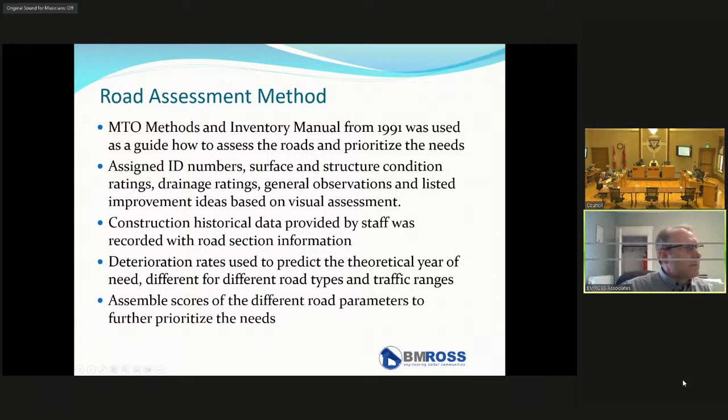We assembled the scores of the different road parameters to further prioritize the needs. This is an example of the appraisal sheets that our technicians use in the field. On the left-hand side, they're entering all the parameters to help define the roads, including condition ratings at the bottom. On the right-hand side, they provide spot.

Road improvements would be localized things in one location. Specific maintenance would be the type of maintenance that might go for the whole length of a road. And other construction work could be storm drainage improvements or other work needed along that section of road. So we can identify that we're in the field, and it helps to provide cost projections that we can use in the reports.

At the bottom is where we would put the information pertaining to the history of road repair work that's taken place in the past. That might help a little better. Down here is where the history information is kept.

Okay, jump ahead. This priority scoring figure just helps to illustrate the relationships between the information we gather in the field and how we work towards the priority scoring.

On the left-hand side, there are three key parameters that we look at. There's the performance grades, which is a score to say whether this road is built up to the type of standard and the way it should be built, or if it has a lot of high maintenance needs. We would have a score for that.

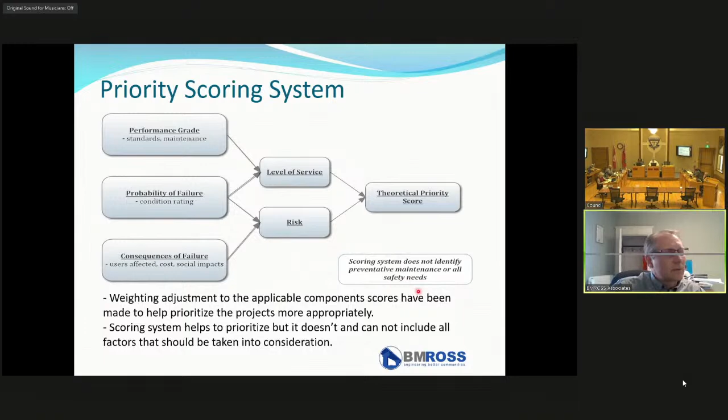The scoring system helps to create risk scores and level of service scores that can be used with your asset management. Performance grades allow the ability to identify other deficiencies with your road systems and put some emphasis on addressing safety concerns or substandard assets.

It provides a theoretical priority score for the improvements, and it's considered a simplified scoring method or concept that can be used with other types of assets as you're trying to prioritize your needs.

The scoring system is intended as a guide when creating a priority list, but there are other external factors that can have an influence on the priorities. For example, you may have water main needs, or some other bridge needs. So there are times when you'll want to adjust your priorities for road infrastructure improvements to correspond with that other work.

Just to summarize some of the issues with using the theoretical scoring system: it does not help identify preventative maintenance, so you have to take a look at those things afterwards or separately. There may be overwhelming safety needs that have to be addressed, some in the short term with maintenance repairs, and some more long term.

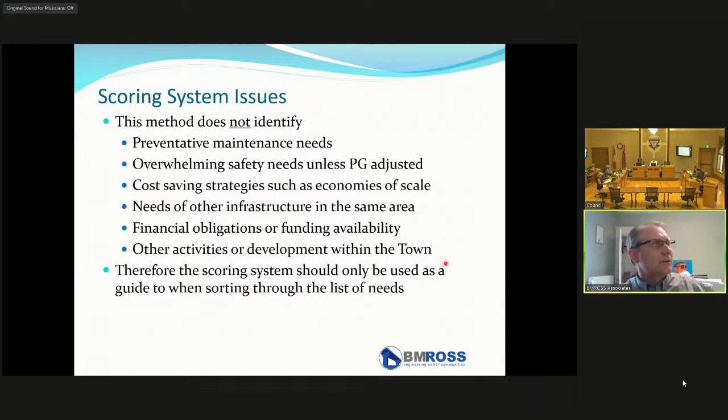And you can save money by pooling them together. There's needs for other infrastructure in the area - if you have water main needs or something, you may have to pull the road work ahead. There's also financial obligations, funding availability, and other development taking place within the town. So the scoring system should be used as a guide when sorting through your list of needs, and then you adjust your priorities after that.

So next I'm going to talk a little bit about some of the information we gathered, some statistical information about your road inventory.

In the top left, you'll see your road surface types. There are 4 road surface types within the municipality, a total of 354 kilometers, with 179 being gravel, 24 kilometers of LCB, 30 kilometers of HCB with only 1 lift of asphalt, and 120 kilometers of asphalt, high-class bituminous roads with 2 lifts of asphalt.

On the right side, this is the roadside environment. Again we have the same total, but this is grouping them based on whether it's an urban road in town with curb and gutter, or semi-urban, which typically has a shallow swale and might have sidewalks in town but no curb and gutter, often with a sub drain to help provide drainage. Then there's rural road sections, which have a full ditch down to the proper grade to allow drainage.

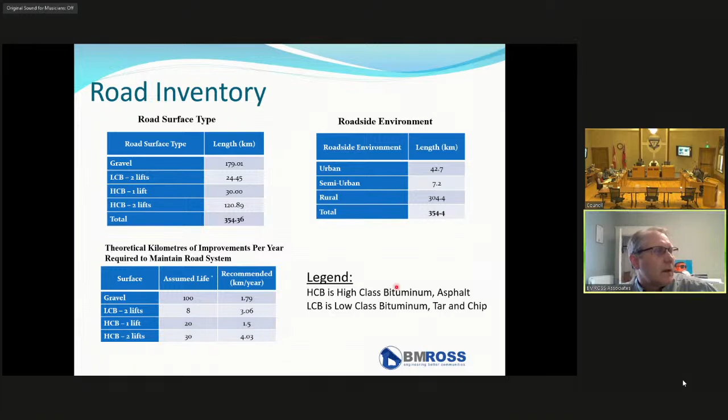Okay, I'll just jump over to the next slide. This next slide shows the condition ratings for the road sections.

This is showing the condition rating of the road surface. You can see here we've got some surface ratings, and the structural ratings are here - I'll discuss them in a minute. But the surface ratings are based on the condition of the surface of the road. For example, with the HCB, you're looking at how many cracks and some ride quality issues, but you're mostly looking at what you see from the top.

We find that the road surface condition rating is a good parameter to help prioritize, but we also want to take into consideration the structural rating when figuring out what method of repairs is appropriate, because a road could have a similar amount of cracks but be deteriorated for different reasons - it might be age, or it might be that the structural integrity isn't appropriate and you're getting wheel rutting. So that's why when we assess the roads, we assign two condition ratings: one for the road surface, another for the structural rating.

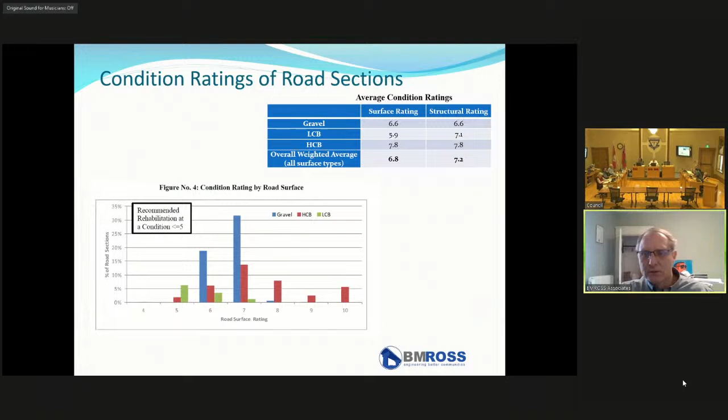I'm just curious about how the traffic counts are calculated and over what period of time were they calculated?

Ken: The traffic count data was supplied by the municipality. I may have to let the municipal staff clarify what year the data was from. Typically they don't analyze every single road, they'll analyze a representative sample and extrapolate that traffic data onto other segments. Don, are you available to comment on when the traffic data was collected? Or Shane? I can answer that. Through you, Mayor Finch, the traffic data was collected through the non-peak summer hours, pretty much when kids are out of school, because that's only about 2 months out of the year. Then they're up for 48 hours consecutive, and that's how we get the traffic data.

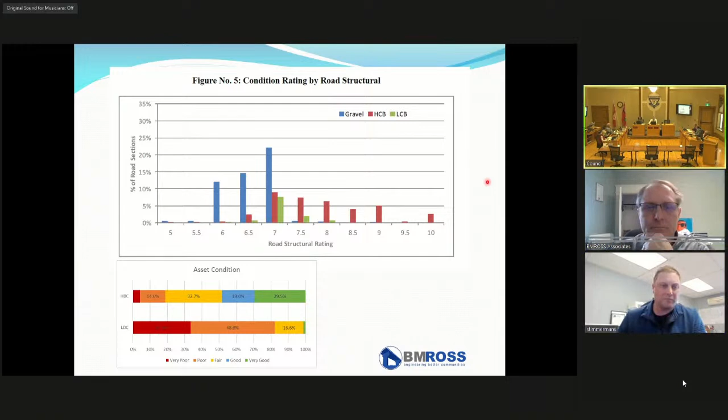Main Street is a little different — they stay up a little longer just because of the influx of up and down traffic. Thank you, Councillor Need. Thank you very much, Shane. Councillor Oak, go ahead please.

Thank you, Mayor. The 54 locations referred to in the report — is it possible to see those locations? The report says there are traffic counts at 54 locations throughout the municipality.

I'm wondering if something could be provided after that we could receive — I'm just curious which roads we're actually doing the traffic counts on, or traffic assessments on.

Yeah, we should be able to provide some of that information. I know we were given some of it — it may not be documented in there, because we were supplied the end assumptions for the different road categories. Your staff are familiar with where traffic typically turns and where the destinations are, so they can use that knowledge to more accurately predict where traffic goes within the municipality. But yes, we can look into that. Okay, thank you.

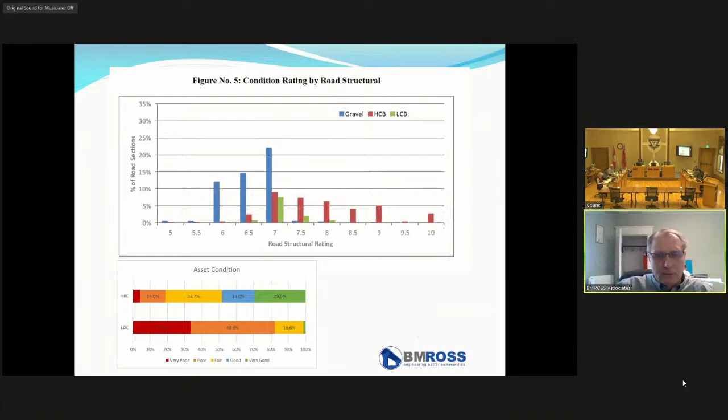Reviewing the information, our general comments identified in the body of the report were: condition rating suggests that many of the roads are due for reconstruction within the next few years. There are some areas where drainage improvements were recommended and ditch cleanout work.

The LCB roads appear to perform well for short terms, but these roads are not being surfaced quickly enough. With the limited number of LCB roads within the municipality, it may not be financially beneficial to continue with the LCB program. We noticed with some of the pricing you guys have paid in the past, that was a discussion that came up with staff, and we had to admit that yes, you are paying quite high prices, probably because of the small volume of roads you're doing.

On a relative basis, there are more road sections at Exeter, Centralia, and Crediton in need of work within the next 15 years than elsewhere within the municipality. There were some low traffic gravel roads with a poor base that are soft in the spring, but it's difficult to justify doing reconstruction for some of these, or for most of them.

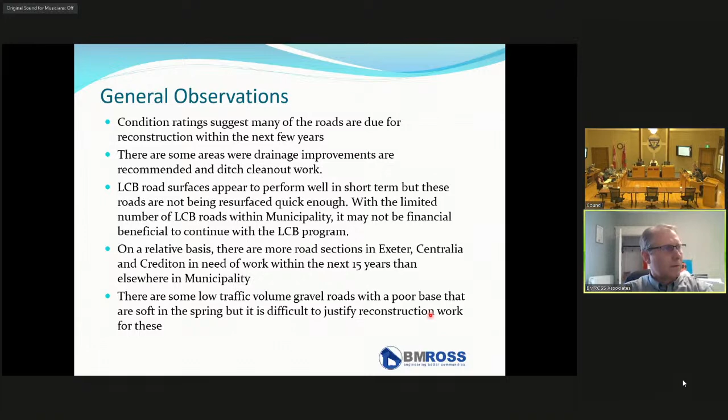Now we're going to talk a little bit about the minimum maintenance standards. The Ontario regulation 239/02 defines the minimum maintenance standards for highways, which includes some rules for sidewalks and for bike lane maintenance requirements.

The regulation sets out a system for different classifications of highways, and based on the speed and the average daily traffic count, the highway classification values are used to determine the minimum maintenance standards. These include things like patrol frequency, weather maintenance, snow and ice removal, road maintenance works such as fixing potholes, cracks, shoulder drop off, signs, and illumination inspections.

Once the municipality is aware of the maintenance issues, the regulation sets out how many days you have to complete the temporary or permanent repairs.

Down below, we provided a table which shows the distribution for the roads within your municipality. You've got so many class 3 roads, class 4 roads, class 5, and class 6. Class 1 would be your major arterial roads, which you don't have within your municipality. Class 6 are your back roads with very low traffic volume.

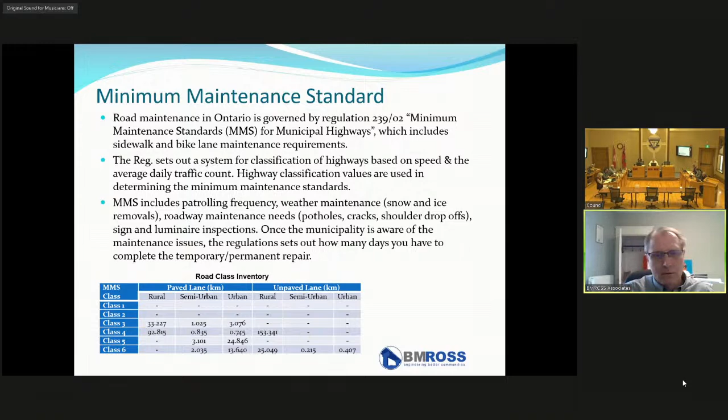The minimum maintenance standards also include some criteria for sidewalks, and sidewalk maintenance includes a requirement for annual inspections of the sidewalks within the municipality. Maintenance requirements cover things like discontinuity of height, say if there's a ledge that jumps up about 2 centimeters between the panels—these are to be identified and corrected.

There's encroachment like branches—say if you have branches hanging over the sidewalks, they'd be trimmed back. And winter maintenance for snow and ice removal and sidewalk patrols. Again, similar to before: once the issue is identified, the municipality is to work their way through and correct those things within a specific time period.

Now, there's also accessibility standards, the AODA standards. They're stricter than the minimum maintenance standards, but they only apply to how you construct brand new sidewalks, not how you have to maintain your existing sidewalks.

There are options for doing temporary sidewalk repairs, such as highlighting with paint. If there's an adjustment in height along the sidewalk, cold patching or grinding to remove those lifts. That kind of goes with the minimum maintenance standards, which we see taking place in most municipalities.

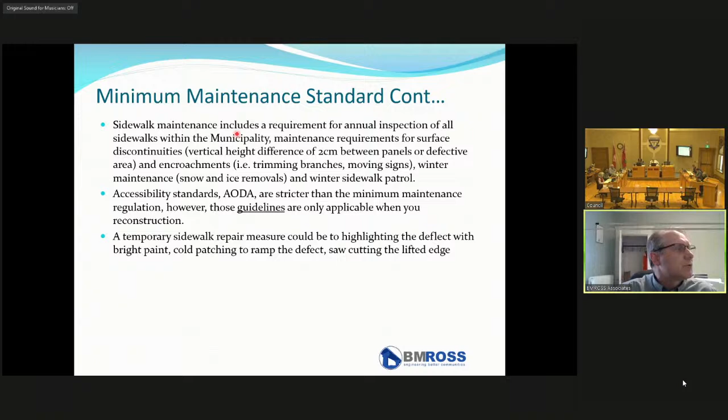Gravel road maintenance tasks, just to recap or summarize: maintenance to maintain suitable drainage for the road base as required, which would include cleaning out ditches and trimming back trees.

Road surfaces would be done every second year—they'd be placing calcium chloride annually, and resurfacing the roads with some additional granular A every second year. They may stretch the resurfacing to every third year on some roads, on some of the no-winter-maintenance type roads.

Grading of the roads takes place numerous times throughout the year to minimize potholes, wheel rutting, and maintain the crossfall. Based on some information we've obtained from municipalities, they spend on average about

$446,000 for resurfacing, calcium, and annual granular tonnage. We're suggesting, based on the kilometers of roads, that you wouldn't want the volume to drop under 33,000 metric tons to maintain the current level of performance of your gravel roads.

Just one second, Ken. Go ahead, Councillor Oak.

Thank you. On this slide, based on the number of gravel roads we have, you're recommending 33,000 tonnes. Our last budget had 28,000 tonnes for this year and 29,000 tonnes for last year. We haven't had 33,000 tonnes since 2018. I want to note that because some of the road conditions we're seeing right now, I think, are because of a lack of gravel being put on them. So just a comment.

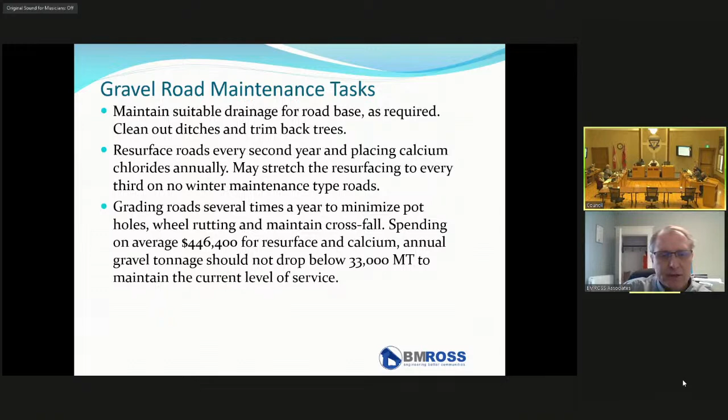Okay, thank you, Ken. If I jump ahead to the next slide: low class and high class bituminous road maintenance. With those, you want to maintain suitable drainage for the road base, again doing ditch cleanout, and work for the road surfaces when required. We haven't listed it here, but similar to the gravel roads, heavy tree cover can sometimes affect the performance of the asphalt if it's canopied right over top.

Applying shoulder gravel as needed, crack sealing, and asphalt patching sections of the HCB at appropriate times. An additional allowance of $230,000 per year is recommended to address specific maintenance needs on the low class bituminous and high class bituminous roads. Additional costs for shoulder grading, line painting, and cold mix patching on the LCB and HCB roads are to be addressed by staff during their roadside maintenance.

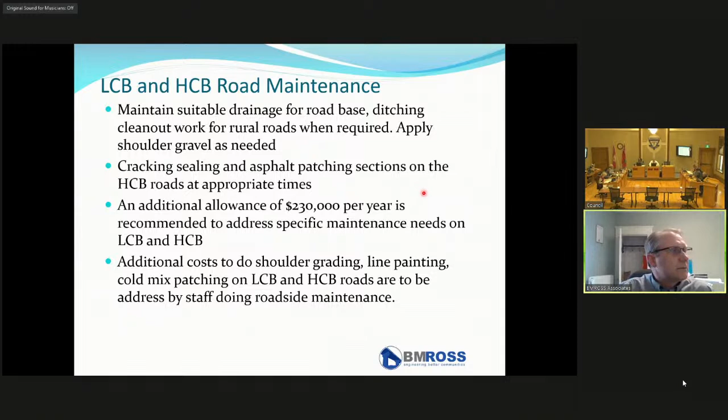Okay, so analysis of the data for the low class bituminous roads: over the last 5 years, resurfacing has taken place on less than about 3 kilometers of the low class bituminous roads versus a recommended average of 15 kilometers. You spent $129,000 in the last 5 years versus a suggested budget of $129,000 per year for the low class bituminous. Some of the low class bituminous roads are experiencing relatively high traffic volumes year-round and warrant upgrading to high-class bituminous. I'm going to talk more about the low-class bituminous in future slides.

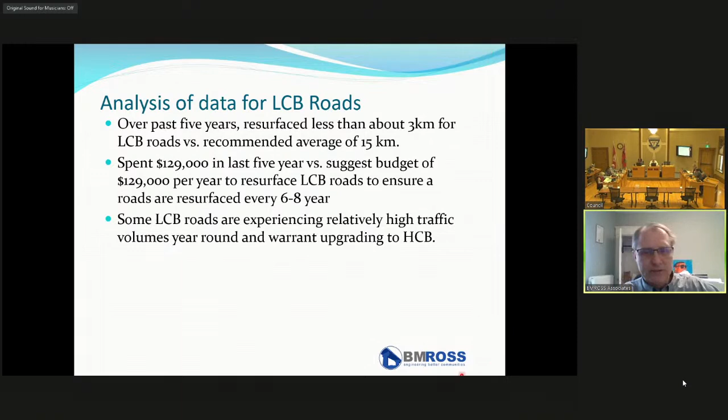We did some probable cost comparisons between maintaining gravel roads, low-class bituminous, and high-class bituminous roads over their service life, looking at annual maintenance costs. For gravel, that includes gravel and calcium placement. With low-class bituminous, that's just maintenance work that may be required, like localized patching and shoulder work. For high-class bituminous, you'd include crack sealing, shoulder work, and line painting. We also include sand and salt application in the maintenance cost, which we get from the municipality, but it's something to keep in mind—once you pave the road, there's additional cost you encounter because of that.

Then we have the annual capital costs. Again, with gravel roads, we're almost never reconstructing them—we're generally just putting a new layer of gravel on top. With low-class bituminous, they should be resurfaced regularly. With high-class bituminous, they're more expensive to reconstruct and are done at more like 20-year increments, but we've spread that cost over an annual basis when presenting it in this graph.

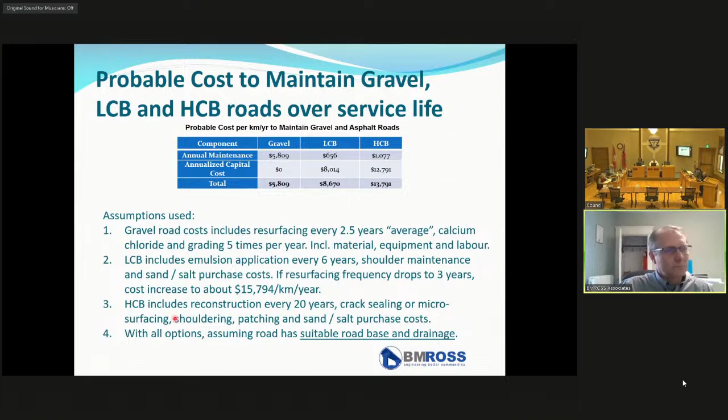High-class bituminous surfaces distribute loads better and can perform better when exposed to heavier and more frequent wheel loads. Just in some municipalities, they found the low-class bituminous, because of the Mennonite traffic and their buggies, have concentrated loads.

They found they don't perform very well either. With the low-class bituminous, one of the advantages is it will flex and sometimes knit back together, and will be more forgiving if the road has poor drainage. But drainage improvements may be warranted as you transition from low-class to high-class bituminous, because the high-class bituminous is more susceptible to damage due to frost action if you don't have adequate drainage.

Sorry, Ken. Councillor Vaughn, go ahead please. Yes, Ken, I have a couple of questions on the slide you were on. Yeah, that slide. That's it. Sure, okay.

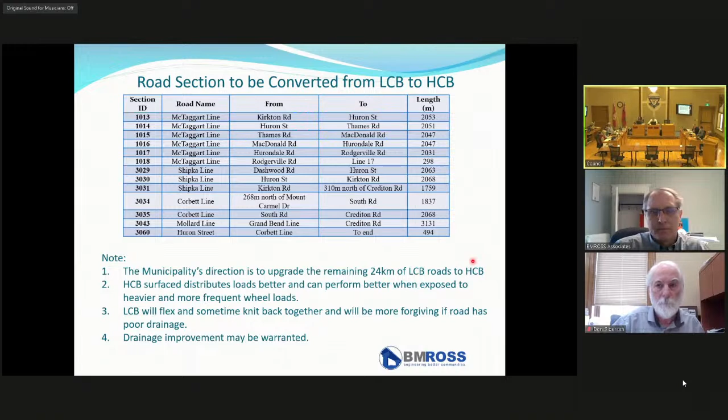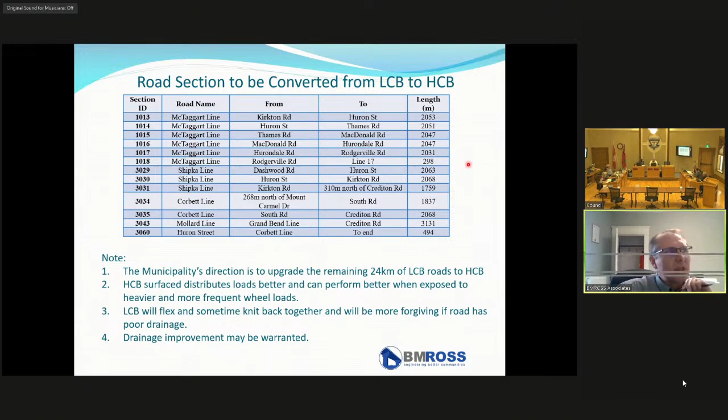Okay, thank you. I just might add one little comment with that. With this conversion to the HCB, we do include an allowance for some other improvements such as drainage, but as Don said, you have to do a detailed assessment of each road section, and some it might be sufficient, some it may not be sufficient to allow for that extra work that's needed before you put your asphalt surface down. I will jump ahead to the next slide.

Okay, so this next slide shows we've taken all the information and assembled it together here in sort of a summary to illustrate the costs for capital improvements per year over the next, I guess we've got 14, 15 years there. And you can see that we've got ranges, the average is 2.1 million per year.

And it ranges from, I think we got 1.5 as the low up to 3.3. And these numbers are presented now, they don't take into consideration whether you get any grant funding or some other stuff. These are just anticipated costs. And they include the upgrades to the LCB roads to the HCB roads that we were just discussing in the previous slide, so those have been incorporated into these numbers, assuming that work's going to try to proceed.

So general improvements generally only include capital cost for reconstruction or resurfacing of the roads. It excludes the gravel resurfacing costs - those are sort of under your maintenance costs. It includes an allowance to convert LCB roads to HCB where proposed.

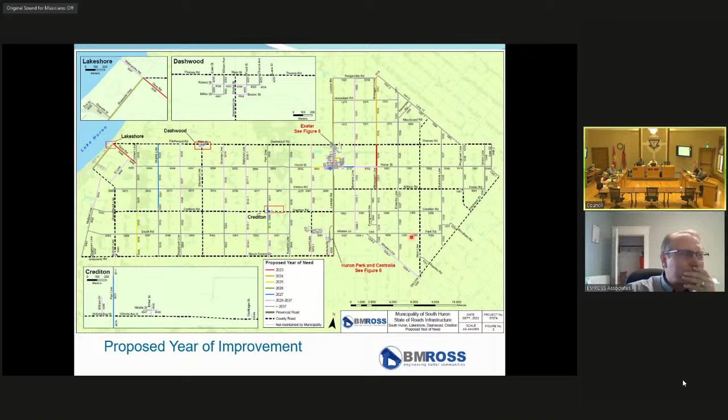Yes, Ken, before we move on to sidewalks, thinking about your comments on capital improvements, throughout the reports I didn't see any indication of looking at our roads through a climate change lens. Over the past couple of years we've had presentations and commentary with staff and council about freeze-thaw cycles and their frequency as a result of climate change, and how that's likely to impact the sustainability and longevity of our road system.

I don't really see anything in your presentation or backup work that talks about calculations or allowances for climate change. I'm wondering if any of that was taken into account, or if there's anything your firm is finding that the industry is moving towards to grapple with this ongoing or anticipated freeze-thaw cycle phenomena with climate change.

Thanks for your question. I'll answer in two parts. One, we agree wholeheartedly that drainage, making sure you've got suitable drainage along your roadways, is a very important part of the performance. With our assessments, where it's been identified, we'll indicate we see a drainage improvement need in this area, whether it be ditch cleanouts, sub-drain, or something like that.

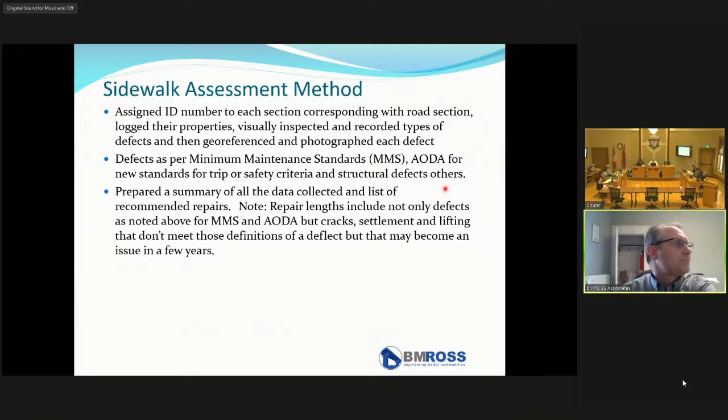Okay, go ahead, Ken. Is there a question? No, go ahead. That's fine. Okay, so on this next slide, we're showing that some defects were identified, and we've got recommended repair lengths. These might be things that should be addressed in the near term, but they're recommended repairs to work on over time. If some things don't get repaired as fast, you might have other defects come up in future years. But per the minimum maintenance standards, municipal staff are required to review the sidewalks each year and check for localized defects that could be addressed.

Continuing through, you'll notice on the right there's a significant amount of repair costs projected, but this may be extended over quite a few years. As long as they maintain and check for minimum localized repairs as they work along, they can delay some of those sidewalk repairs. The replacement recommendations primarily address cracked panels that would otherwise become defects over time, so completion of those repairs could be spread out for quite a few years. Replacement in lieu of repairs is recommended for sidewalks less than 1.5 meters wide, which is the generally recommended sidewalk width now for AODA.

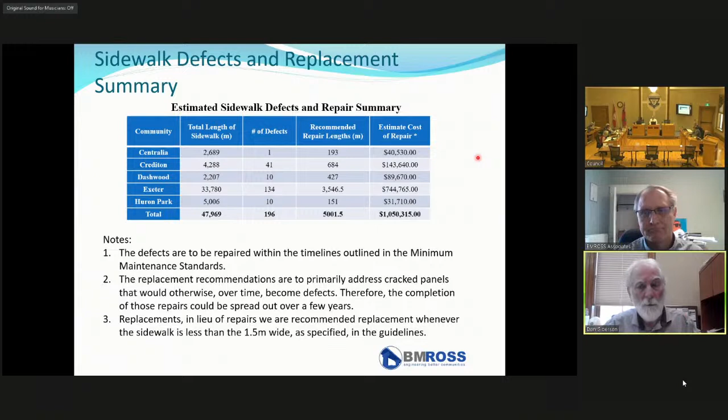Mr. Giberson, do you want to comment? Yes, through you, Mayor Finch. Concrete is the material of choice for municipal sidewalks. Asphalt is sometimes used for pathways or walkway areas, and a lower grade surface such as crusher screenings, dust and chip would be suitable for a trail system. But for a municipal sidewalk within the municipal right of way, it would be concrete.

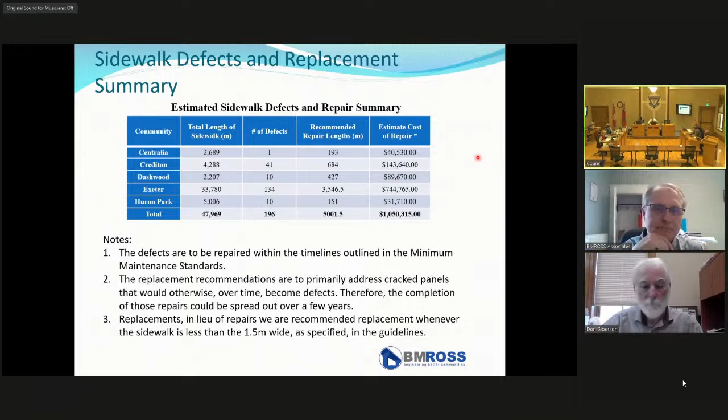Thank you very much. Yep, thank you. Go ahead Ken, you can continue.

This next slide just shows an example of the figures that are provided in the report, where we've shown where some of the defects were identified and the sidewalk section ID numbers throughout that. So this is the defect number, and there's the sidewalk ID numbers.

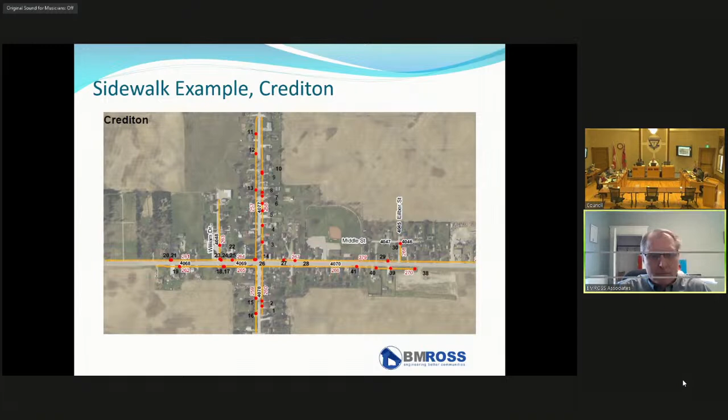So sidewalk condition ratings, the condition scores for the sidewalk replacement are based on defective length of sidewalk relative to the total length of the sidewalk. And as I was saying...

These condition ratings don't just take into consideration where there's trip hazards. If there's cracks, for this condition rating we would still say that it's defective, but that doesn't mean it has to be fixed right away. It's not a minimum maintenance factor. But when we're doing condition ratings, if it's something that should be replaced as sidewalk, we would consider it a defective section.